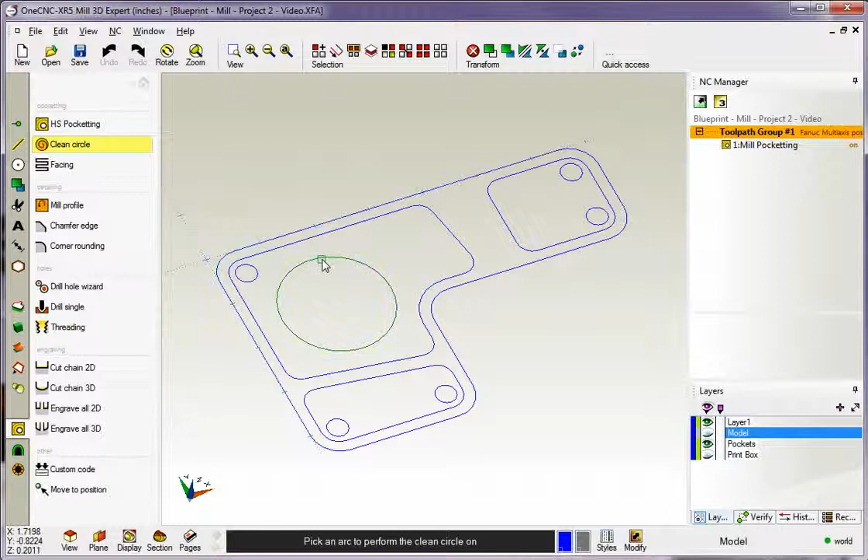As soon as we do that, you can see our cursor now is square, and that means it's looking for a shape or a group of shapes. I'm just going to left click on that, and when we're done selecting, we right click. Just like in our previous machining operations, we now have our Select Tool dialog box.

You can see I already have a diameter set at 0.625. This is going to be in turret position number 2. I've got a feed rate set at 12 inches, that's my XY feed rate, and I have a plunge feed rate, or Z feed rate, set to 6 inches.

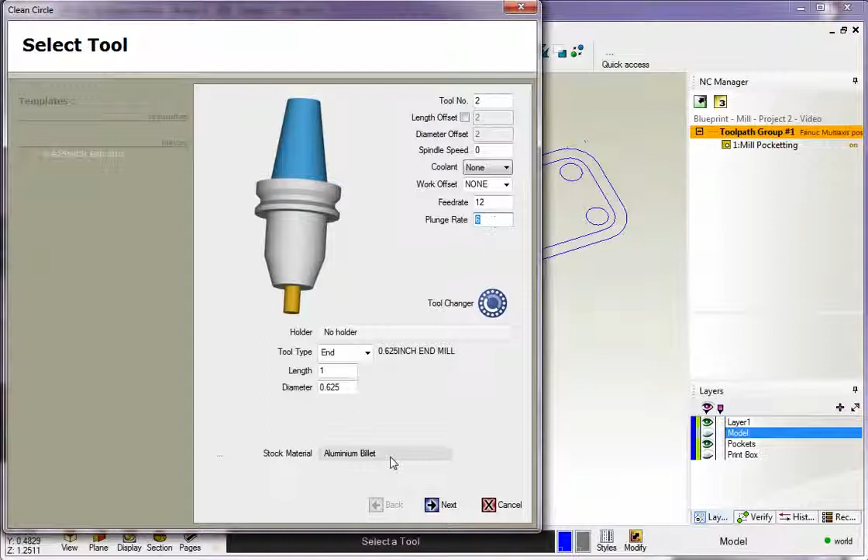That all looks fine. So now we have our Clearances dialog box, and I have a rapid clearance plane set to a 1/2 inch. My plunge clearance is set to 50 thousandths. That's where it's going to start feeding down.

Now this is where things get a little different. I want to point something out. In our previous video, when we took a look at machining these 3 pockets, the material top was set to Z0. But remember, each one of these pockets has now been machined to minus 0.75.

So now for material top, you don't want to put 0, you want to put minus 0.75. If I put 0 here, OneCNC is going to feed all the way down from 50 thousandths above 0 and then all the way to depth. I don't want that, so I'm going to put in minus 0.75, and you can see that the plunge clearance is an incremental distance from the material Z top. That's designated by these arrows right here.

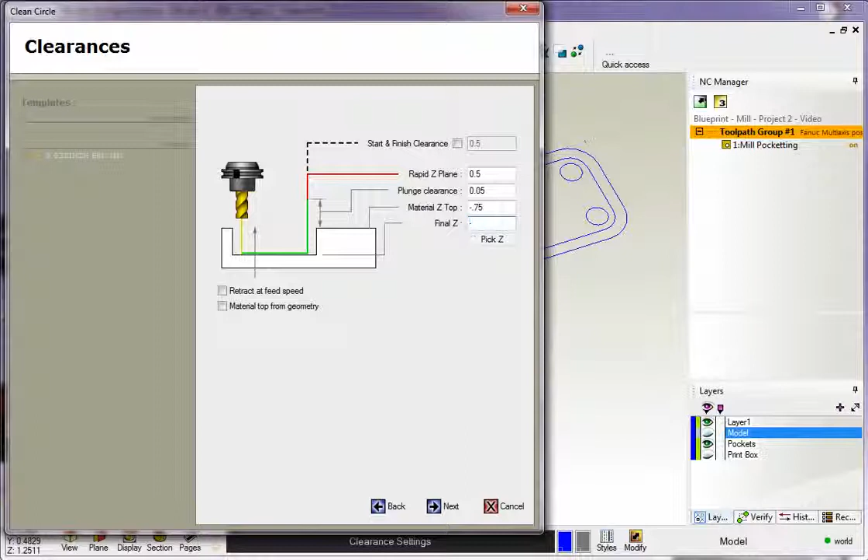So now, with a plunge clearance set of 50 thousandths, the tool is going to rapid in and down to minus 700 thousandths, and then feed to whatever depth we want. I'm going to make the depth minus 0.9.

Okay, that looks good, so we'll click Next. This is how we approach the pocket. There are 3 different styles here: plunge, helix, and zigzag. I'm going to go with a helical entry again, with my ramp angle set to 5 degrees. Notice how you can switch between conventional and climb cut for this — I'm going to go with a climb cut.

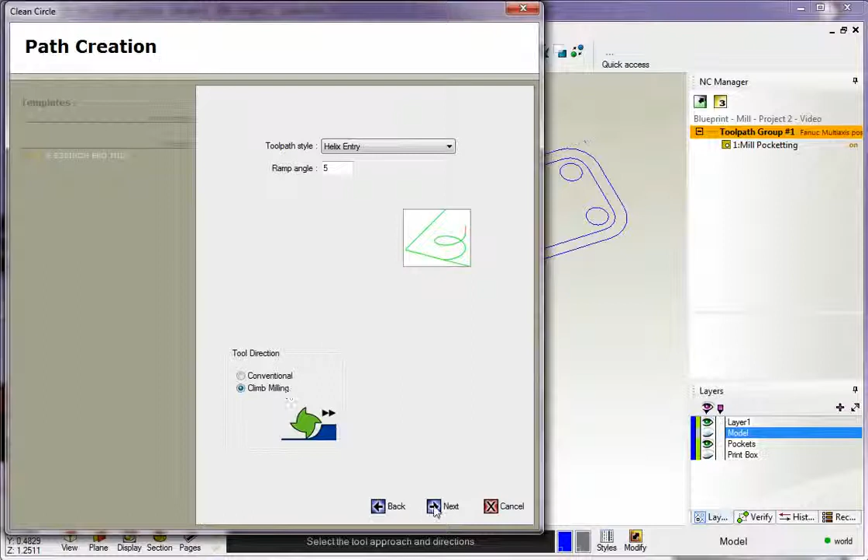We'll click Next. Here's our step over. I'm going to make the step over a little smaller just so you can see that it's a spiral toolpath, so you can see the spiral a little better. I'm going to use a cut increment of 100 thousandths, and I'm going to leave 20 thousandths on the wall.

Now here we have our finish settings. In the previous demonstration I did not use this, but I'm going to use it now. What I'm going to do is set this to bottom. This is going to finish that pocket at the bottom level only.

If we come back here, you can see I left 20 thousandths. By putting bottom only, that means OneCNC is going to remove that 20 thousandths using the exact same tool, but it's only going to machine or finish that at the bottom of the pocket. You could say you want to machine at each rough depth, or you could set your own depth, but I'm going to go with bottom only.

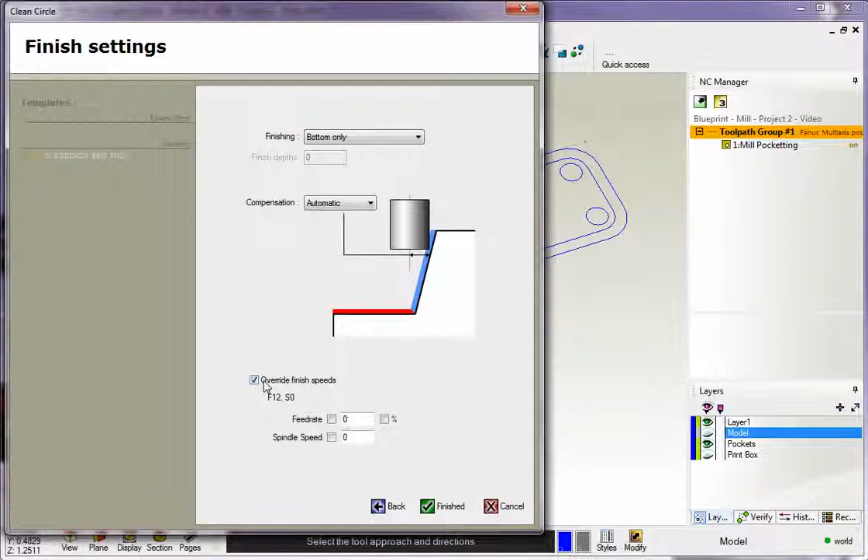You also have the ability to apply cutter comp if you want, G41 or G42, and you can also override your speeds and feeds if you'd like, if you want to kick them up. I'm going to leave them alone and just click Finish.

Alright, so there you go — there is the circular pocket operation. You can definitely see that it's a spiral toolpath, and it's machining all the way to the depth. We've rapided down to 50 thousandths above the pocket floor, and machined it. So it looks great there.